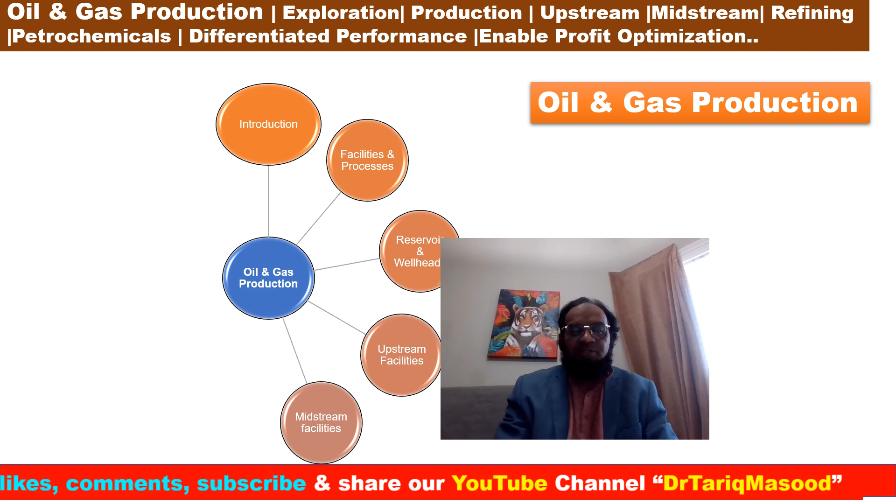Okay, oil and gas production. We have discussed introductions, facilities and process management systems, reservoir wellhead management systems, upstream facilities, midstream facilities and management system, refining facilities, petrochemicals facility management systems, utility system. Today we are going to discuss unconventional, conventional resources, environmental effects. So today we are going to discuss first a topic on conventional and unconventional resources.

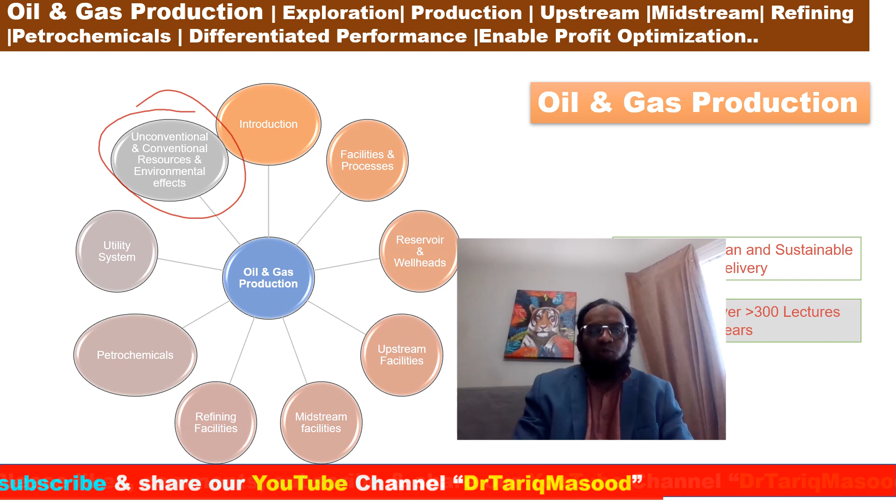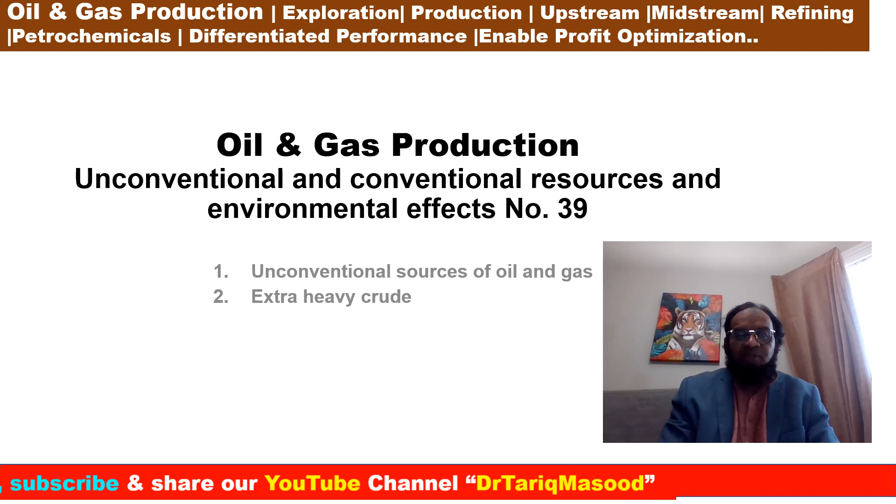Okay, what is the ultimate goal? Shipping the clean and sustainable global energy delivery. Plan to deliver more than 300 lectures in next couple of years. Okay. Oil and gas productions, unconventional and conventional resources and environment effects. Lecture number 39. Unconventional sources of oil and gas. So extra heavy crude, tar sands, oil shale, and shale gas and coal bed methane we are going to discuss today.

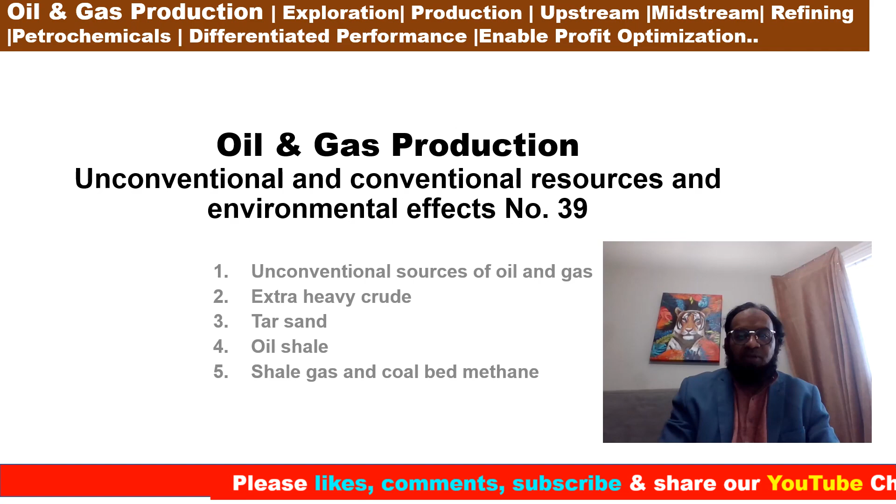Okay, key takeaway points, lecture number 39. Unconventional resources, oil and gas, extra heavy crude, tar sands, oil shales, shale gas, and coal bed methane. Okay, unconventional conventional resources of oil and gas.

As per IEA 2012 statistics, about 81.1% of the world primary energy consumption in 2012 was of fossil fuels. 27.3% was coal, oil production was 32%, about 4.01 billion tons, and 21.4% was gas, with 3.39 trillion SCM or 3.01 billion tons oil equivalent, that is TOE. So the total oil and gas production was 6.4 billion TOE, which is about 128.5 million barrels of oil equivalent per day, consumed in 2012.

Proven reserves are estimated 201 billion TOE of oil and 6,707 TCF of gas, 180 trillion SCM, 160 billion TOE for a total 361 billion TOE converted from estimates by US Department of Energy 2012, indicating that proven reserves will last for about 56 years.

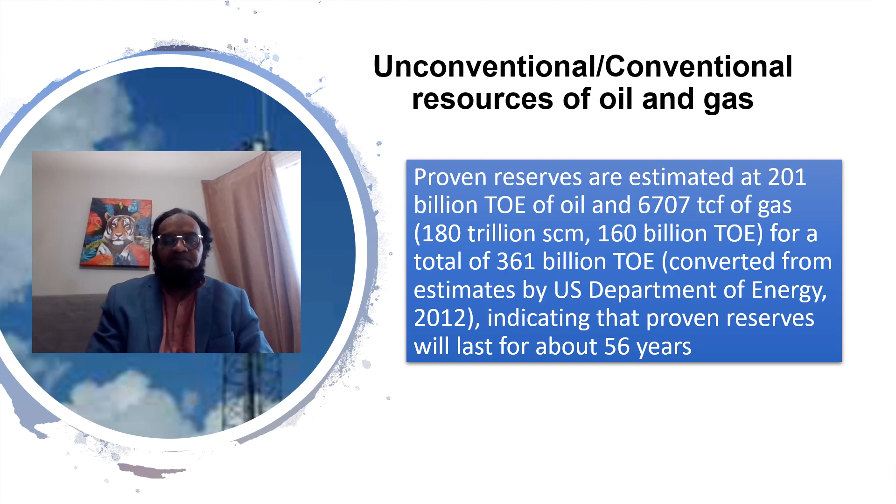Okay, unconventional sources of oil and gas. The reservoirs described earlier are called conventional sources of oil and gas. As demand increases, prices soar and new conventional resources become economically viable. At the same time, production of oil and gas from unconventional sources becomes more attractive. These unconventional sources include very heavy crude oil, oil sands, oil shale, gas and synthetic crude from coal bed methanes, methane hydrates, and biofuels.

At the same time, improved oil recovery IOR can improve the percentage of existing reservoirs that can be economically extracted. These effects are as you can see in the diagram here. This red line here, this area is IOR, improved oil recovery, in the yellow area, and this is recovered oil. So this is the recoverable oils and production, and over here this is the explorations. So IOR, improved oil recovery, and non-recoverable area over here.

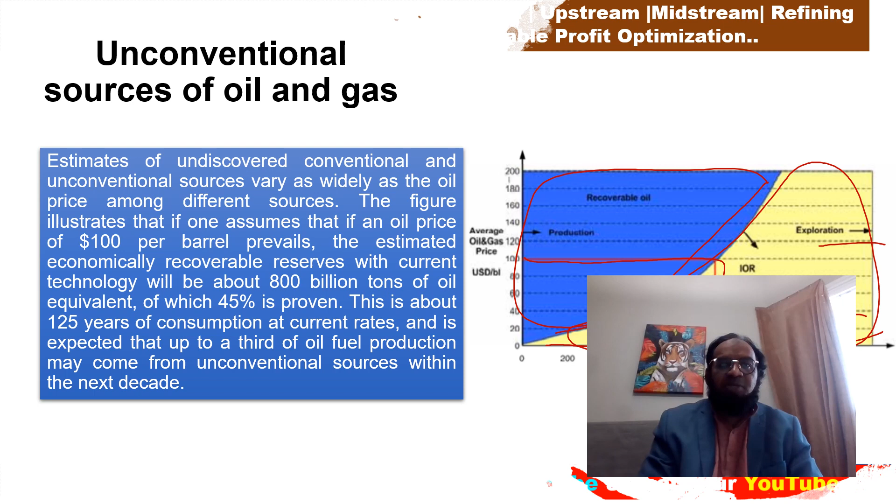Okay, so based on that, estimates of undiscovered conventional and unconventional sources vary as widely as the oil price among different sources. This figure illustrates that if one assumes an oil price of $100 per barrel prevails, the estimated economically recoverable reserves with current technology will be about 800 billion tons of oil equivalent, or TOE. 45% is proven. This is about 125 years of consumption at current rates, and it is expected that up to a third of oil fuel production may come from unconventional sources within the next decades.

Okay, extra heavy crude. Extra heavy crude, very heavy crude, or hydrocarbon with an API grade of about 15 or below. The most extreme heavy crude currently extracted is in Venezuela, that is 8 API crude, for example, in eastern Venezuela. If the reservoir temperature is high enough, the crude oil flows from the reservoir. In other areas such as Canada, the reservoir temperature is lower and steam injection must be used to stimulate a flow from the formation.

When reaching the surface, the crude must be mixed with diluent, often LPG, to allow it to flow in a pipeline. The crude must be upgraded in a processing plant to make lighter synthetic crude with a higher yield of high-value fuels. Typical syncrude has an API of 26 to 30.

The diluents are recycled by separating them out and piping them back to the wellhead site. The crude undergoes several stages of hydrocracking and coking to form a lighter hydrocarbon and remove coke. It is often rich in sulfur, sour crude, which must be removed. Okay. My next slide, we're going to tar sands.

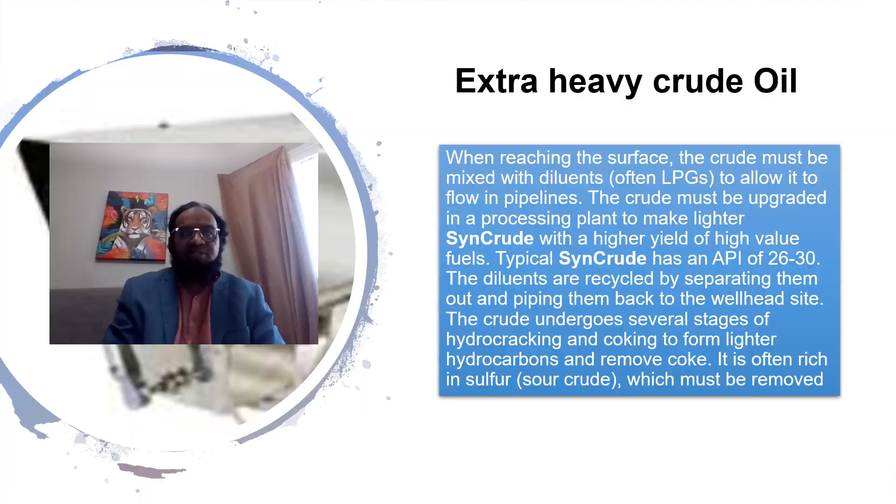Okay, tar sands. The tar sands can often be strip-mined. Typically, 2 tons of tar sand will yield 1 barrel of oil. Typical tar sands contain sand grains with a water envelope covered by bitumen films that may contain 70% oil. Various fine particles can be suspended in the water and bitumen. This type of sand can be processed with water extraction.

Hot water is added to the sand and the resulting slurry is piped to the extraction plant, where it is agitated and the oil skimmed from the top, provided that the water chemistry is appropriate. The water is adjusted with chemical additives. It allows bitumen to separate from the sands and clay. The combination of hot water and agitation, if you can see over here.

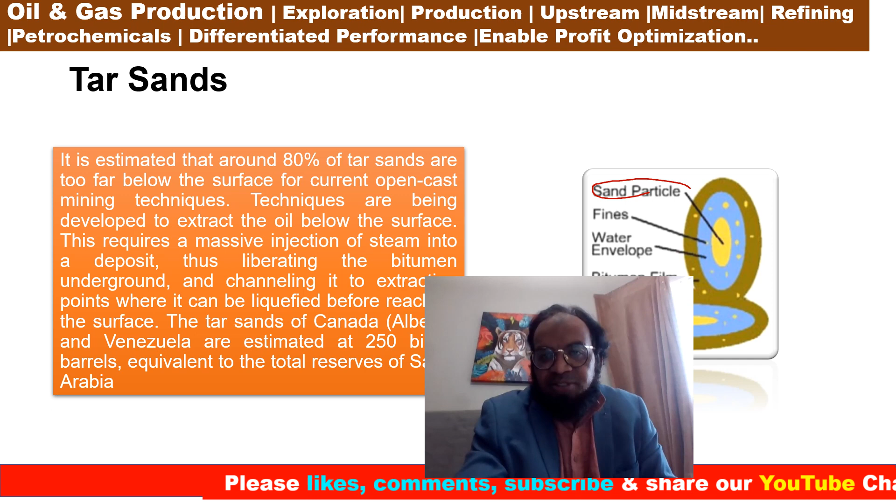So these are my sand particles here, and these are fines here, and this blue color is a water envelope, and this is called bitumen films. Okay, that is one particle of tar sand.

Okay, the agitation releases bitumen from the oil sands and allows small air bubbles to attach to the bitumen droplets. The bitumen froth floats to the top of the separation vessels and is further treated to remove residual water and solids. It can then be transported and processed in the same way as extracted heavy crude.

It is estimated that around 80% of tar sands are too far below the surface for open cast mining techniques. Techniques are being developed to extract the oil below the surface. This requires a massive injection of steam into the deposit, thus liberating the bitumen underground and channeling it to the extraction points where it can be liquefied before reaching the surface. The tar sands of Alberta, Canada, and Venezuela are estimated at 250 billion barrels, equivalent to the total reserve of Saudi Arabia.

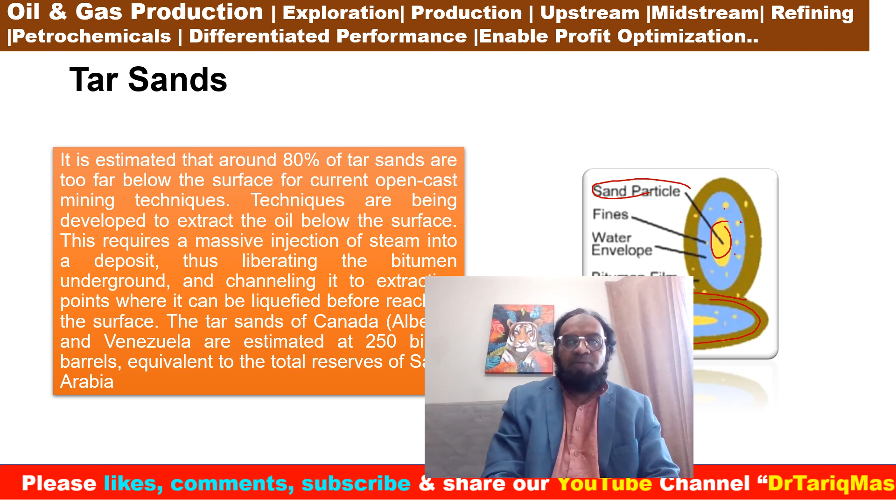Okay, oil shales. Most oil shales are fine-grained sedimentary rocks containing a relatively large amount of organic matter from which significant amounts of shale oil and combustible gas can be extracted by destructive distillation. Significant shale plays have been discovered in the last decade, such as Marcellus in the North US and Canada, Eagle Ford, and Bakken.

Oil shales differ from coal in that organic matter in the shales has a higher atomic hydrogen to carbon ratio. Coal also has an organic to inorganic matter ratio of more than 4, i.e., 75 to 5, while oil shales have a higher content of sedimentary rock. Sources estimate the world reserves of oil shales at more than 2.5 trillion barrels.

Oil shales are thought to form when algae and sediment deposit in lakes, lagoons, and swamps where an anaerobic, oxygen-free environment prevents the breakdown of organic matter, thus allowing it to accumulate in thick layers. These layers were later covered with overlying rock to be baked under high temperature and pressure. However, the heat and pressure were lower than in oil and gas reservoirs.

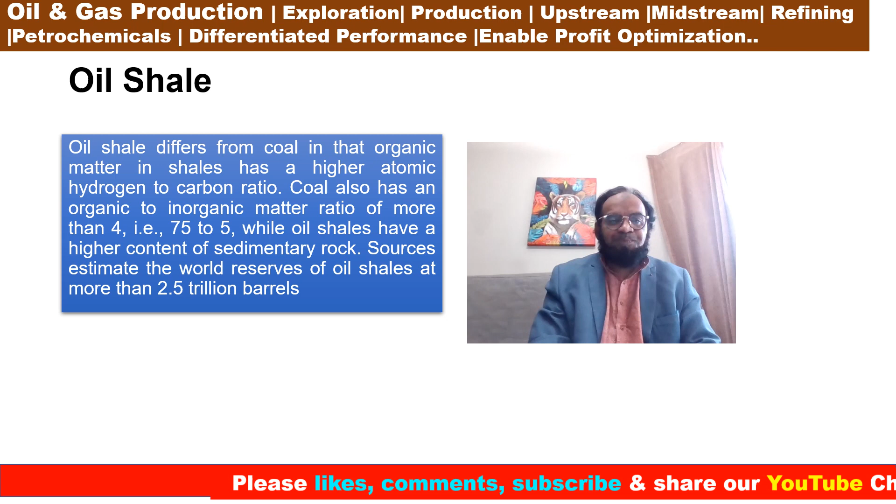Shale can be strip-mined and processed with distillation. Extraction with fracturing and heating is still relatively unproven. Most of the companies are experimenting with direct electrical heating rather than steam injection. Extraction cost is currently around $25 to $30 per barrel. Okay.

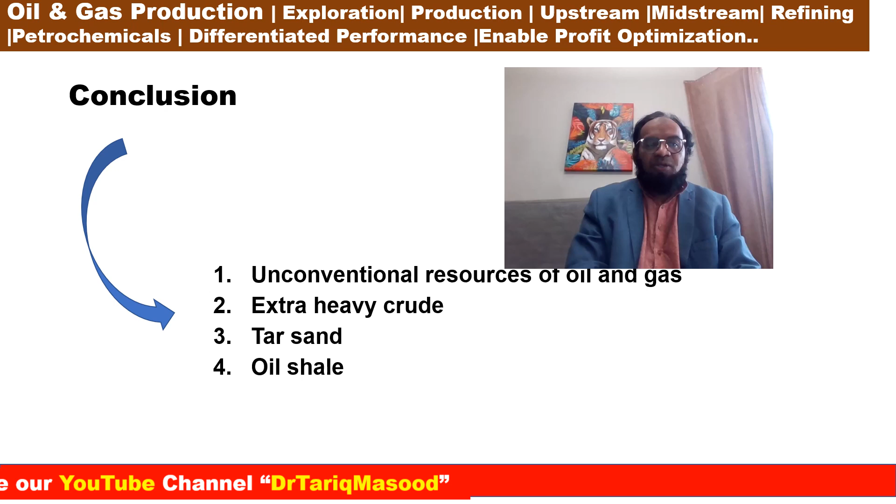Conclusion. Today we have discussed conventional and unconventional sources of oil and gas: extra heavy crude, tar sands, and oil shales. Okay, next topic, we're going to cover coal gas to liquid and synthetic fuel, and methane hydrates.